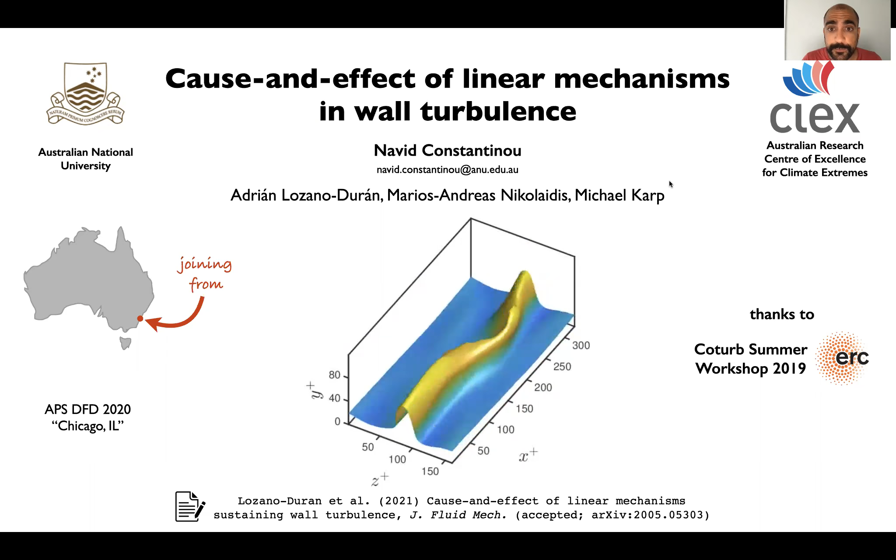The subject is essentially how linear mechanisms contribute to sustaining wall turbulence. We know that in wall-bounded flows, turbulence is sustained via an intimate interaction between coherent structures like the rolls, the streaks, the mean flow shear, and turbulent fluctuations. These interactions come about into what's been called the self-sustaining cycle.

An outstanding question that's been hanging around the past few years is how energy is transported from the time-dependent streak back to the fluctuations to close this cycle. This is something that I'll try to address today.

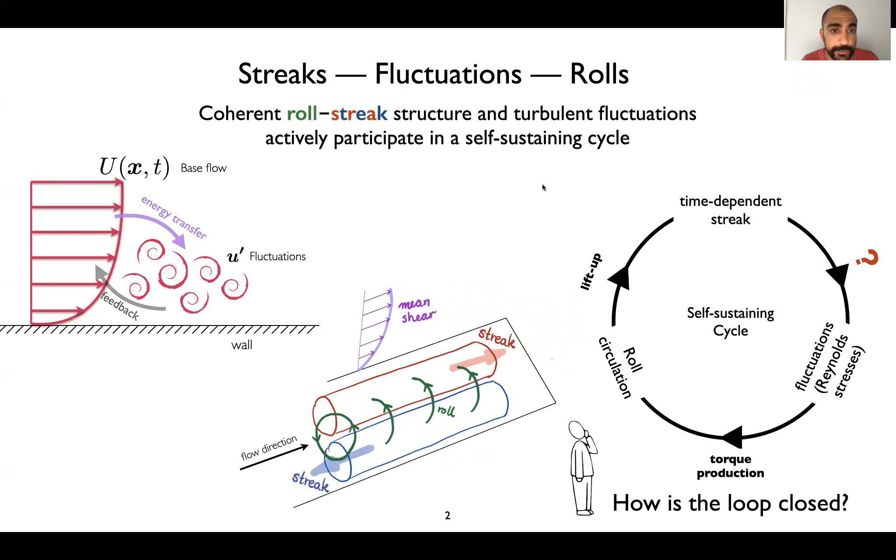Several theories and mechanisms have been proposed for how energy is transferred from the streak back to the turbulent fluctuations. This involves modal instabilities of the streak flow, transient growth due to the non-normality of the linear dynamics, neutral modes and wave-vortex interactions, or parametric instabilities of the time-dependent streak, among others.

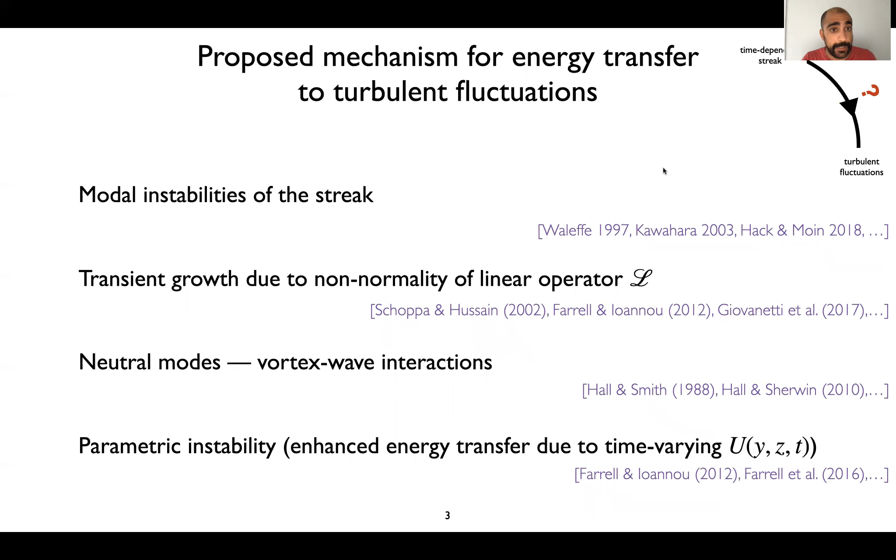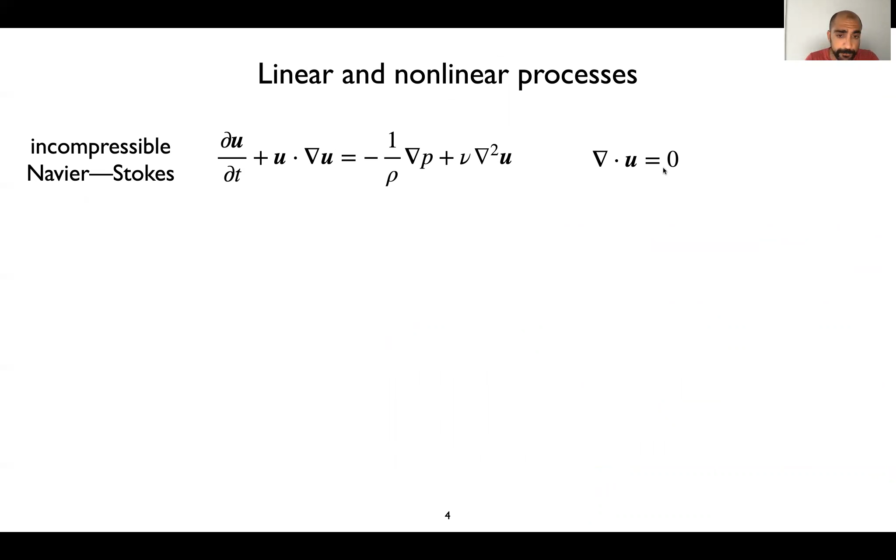So the way we will proceed - let's set the scene. We start with the incompressible Navier-Stokes equations. What we will do is something that may at first seem ad hoc: let's decompose our flow into a base flow that we will call capital U, and fluctuations, anything other than our base flow.

In this particular work, we will take our base flow just to be the streamwise mean of the streamwise component of the velocity. So anything else we call fluctuations. Doing so, we can rewrite our Navier-Stokes equations as two equations: one for the evolution of the base flow and one for the evolution of the fluctuations.

Note that here our base flow varies in the cross-stream, it varies in the spanwise direction, and it also fluctuates in time. So the only thing that we've done is average in the streamwise direction.

Now, the fluctuation equation can be written as shown below, and it involves two parts. It involves a part which has a linear operator that depends only on the base flow itself, and some other part which is quadratic in the fluctuations. This is what we will be calling nonlinear processes.

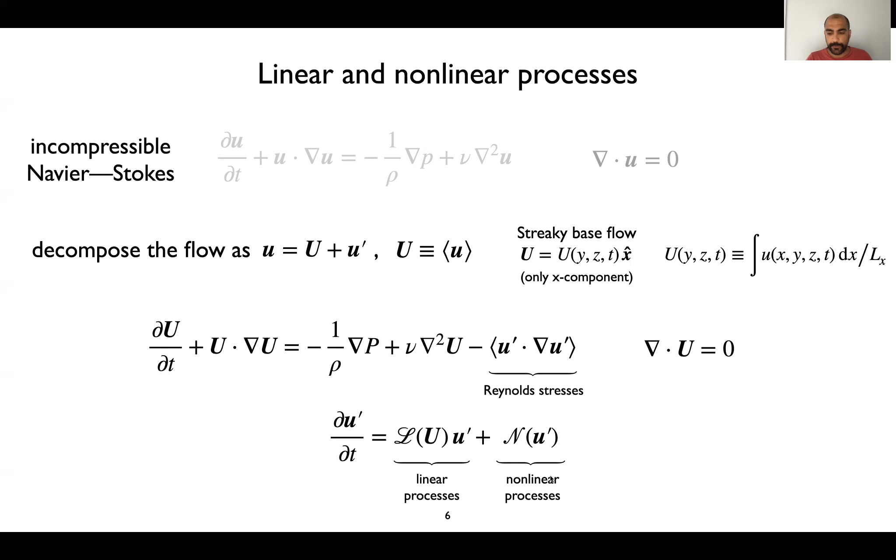So, two remarks. Here, when I decompose my flow, I didn't linearize about any solution of the Navier-Stokes equation. I just ad hoc selected something that I call my base flow, and this base flow has a streak component. It has some spanwise variation, and this will be important.

I decompose my flow and call linear dynamics anything that is included in this process here, which is the linear operator that depends on the base flow and acting on the turbulent fluctuations.

Another thing to note is that if we've chosen our base flow differently, a process that can be included in the linear dynamics here could instead be transferred into the nonlinear part. So what I call linear processes is a function of the choice for what my base flow is.

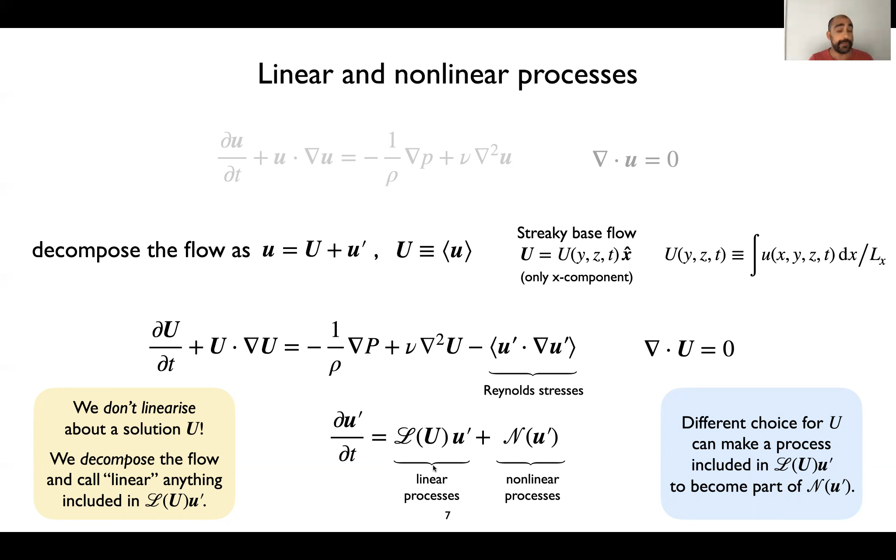So the numerical setup for how we will try to tackle our question of what the main processes are underlying the energy transfer from the streak to the fluctuation is the following. We'll use a minimal flow channel, a constant pressure gradient channel, at Reynolds number tau around 180.

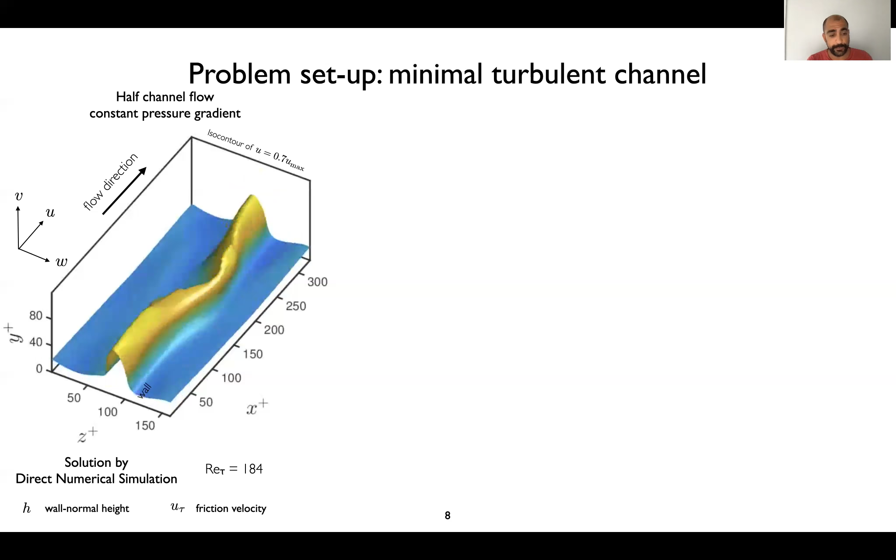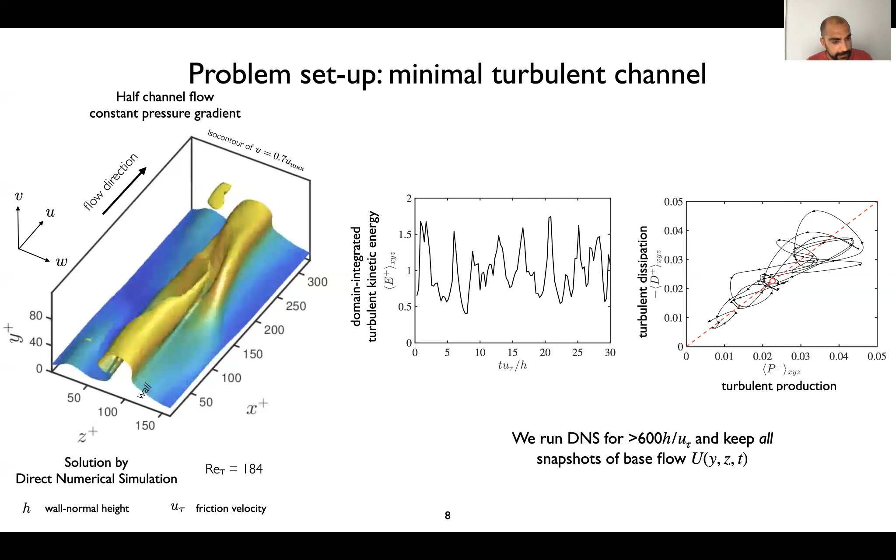What we do is run the simulation for a very long time, and save all snapshots of what we call the base flow, so that we can analyze them later and use them for interrogating our output.

There are two ways to assess the various mechanisms proposed in the literature that come into play. The first method is to interrogate output from the direct numerical simulation. This has the advantage of being a non-intrusive method, but it cannot provide us with causal relationships.

The other method is to go and sensibly modify the equations of motion in the minimal manner possible, so as to preclude some of the mechanisms you're trying to question, and then look at the output of those modified equations.

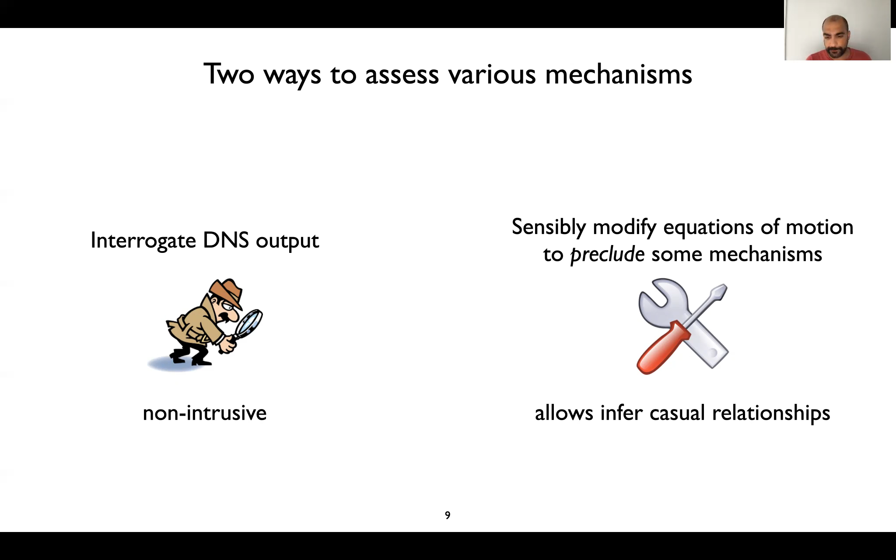This is an intrusive way of attacking the problem, but it allows us to infer causal relationships, which mechanisms are more important than others. So let's start by first asking the question: are modal instabilities of the streaky flow

important for sustaining turbulence? So what do we mean by modal instabilities of the streaky flow? At any point, we have our base flow, we can have a snapshot of our base flow, what we call a base flow, and which involves spanwise variation. So it has a streak component in it.

And we can take our linear operator, the linear operator which was involved in the linear part of the fluctuation dynamics, and decompose it, do an eigen decomposition of that. So here we see the eigenvectors and the inverse of the matrix of the eigenvectors on the right, and we have a diagonal matrix with all the eigenvalues.

So if any of these eigenvalues has a real part which is positive, this means instability of the streaky flow.

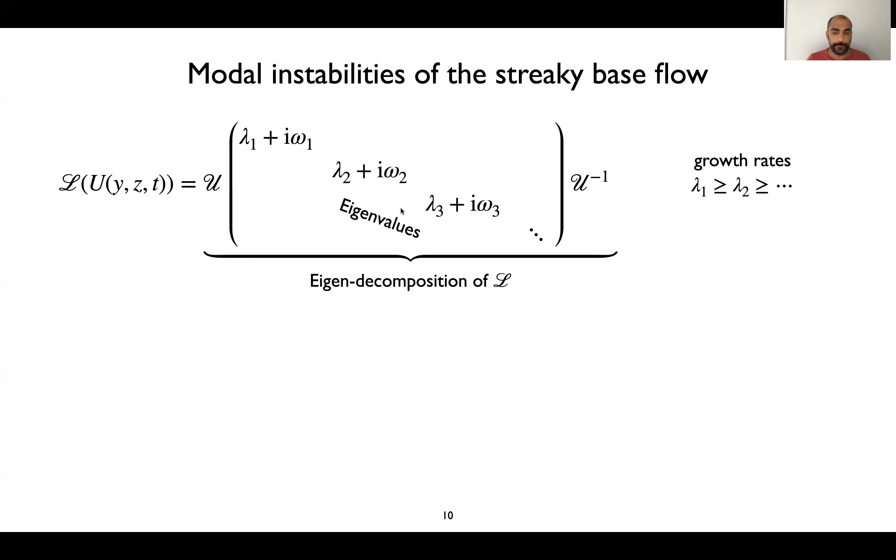And if we do play this game in the direct numerical simulation, we have all the snapshots of the base flow. We've saved all the snapshots at every time step. So we go and we do this eigen analysis at every time step. We see that most of the times, or almost all the times, the flow is unstable. This is the largest growth rate that we find in the flow. And usually there are 2 or 3 unstable eigenmodes at every time instance.

Now, what's also noteworthy is that if you go and compute the autocorrelation of the base flow, we find that the base flow changes at least 3 times slower than the typical e-folding time of these instabilities. So in principle, not only is the flow unstable, but these instabilities have the potential to grow and affect the fluctuations. This is what we get by just interrogating the output.

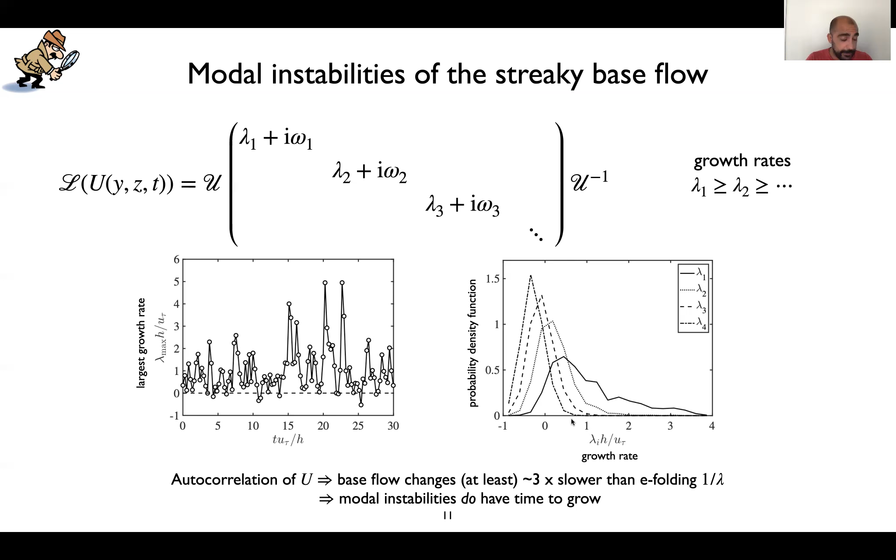Now, if in fact these modal instabilities are crucial for the self-sustaining cycle, it means that if we take them out of the game, then the flow should laminarize.

So what we do is now we go again, and at every time instance, we do an eigen decomposition of the linear operator, and we check whichever modes are unstable, whichever modes have eigenvalues with positive growth rates, we go and make these growth rates negative. So for example, if in this case only mode 1 and mode 2 were unstable, we go and put a minus in front of the growth rates.

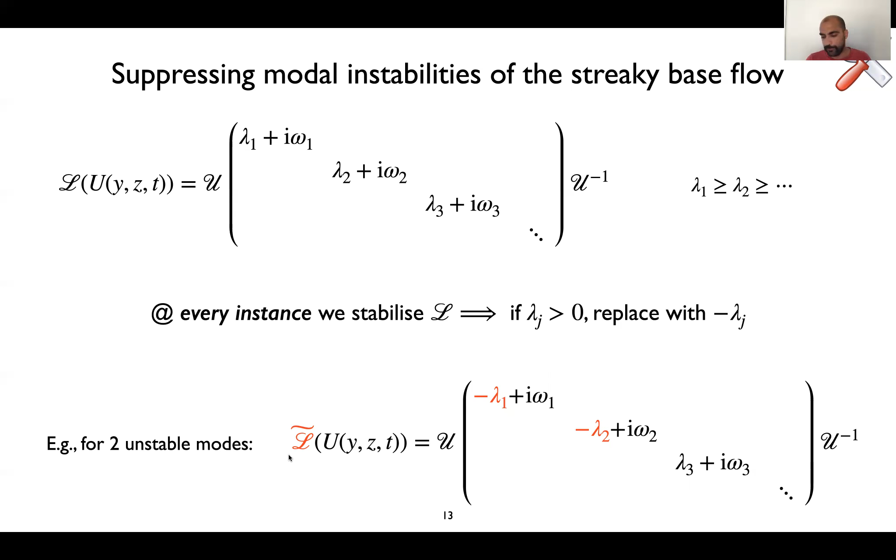We don't change anything else, the structure of the eigenmodes, nothing else is changed. We compose back the linear operator, and we denote it with a tilde on top, just to remind ourselves that this is a stabilized version of the linear operator.

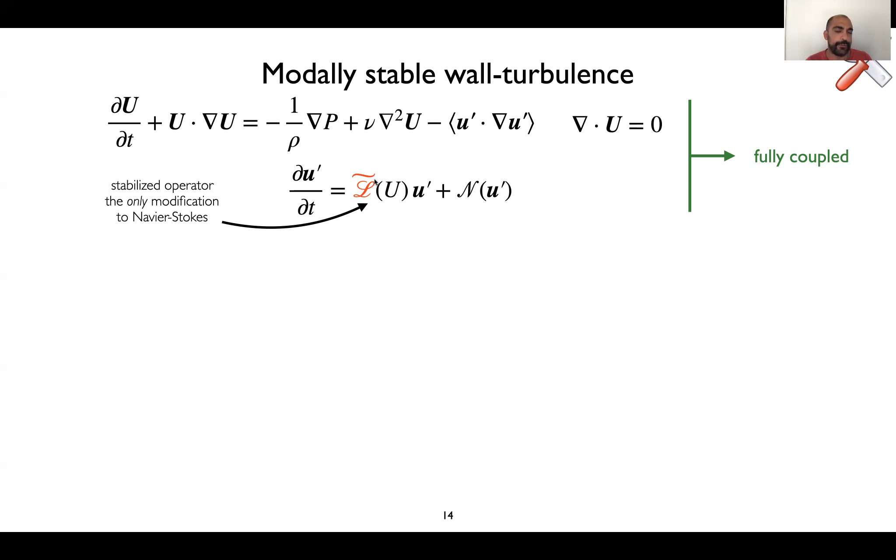And now we can run Navier-Stokes again with only this slight modification, that at every time instance, if our base flow corresponded to a linear operator which had 2 or 3 unstable eigenmodes, these unstable eigenmodes were rendered stable by changing the sign of the growth rate of the eigenvalue, nothing else.

So we do that, and we see that, of course, in this case there are no instabilities by construction, but the flow is still turbulent. So if we see the time series, a slice of the time series of the turbulent kinetic energy, there's still turbulence in the flow. And we see the turbulence production dissipation diagram. It looks more or less like before.

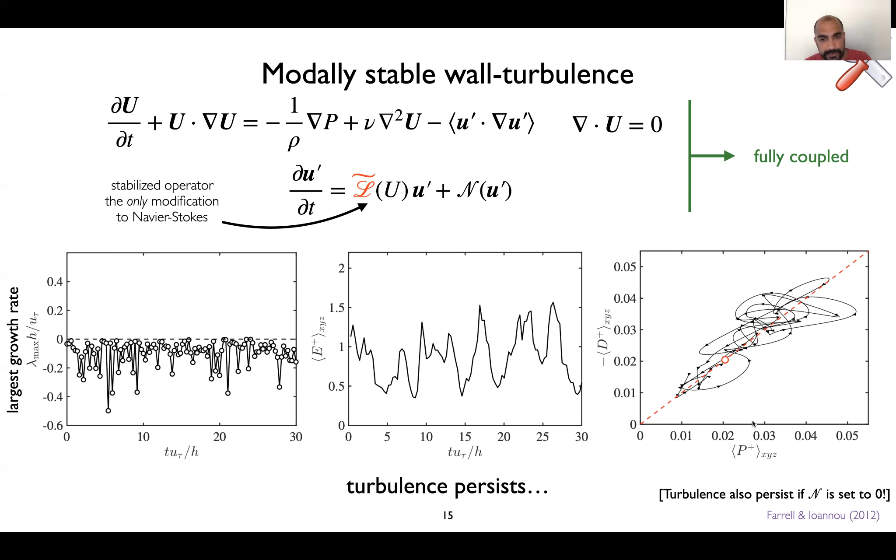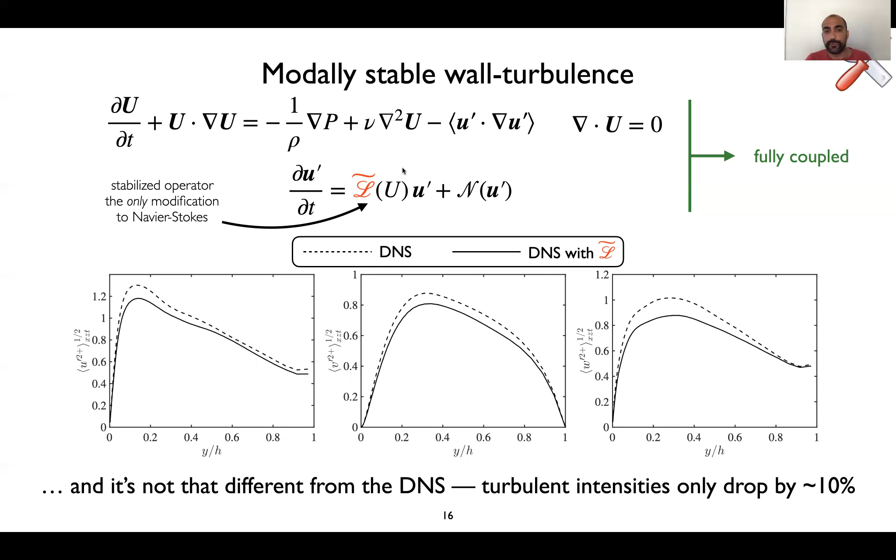Not only is the flow turbulent, but with more or less the same statistics. Here we see with dashed lines the turbulence statistics from the direct numerical simulations without any modification, and with solid lines the same statistics from our stabilized direct numerical simulations. So the only difference, removing the modal instabilities, is that we see the turbulence intensity dropped by around 10%. But other than that, the flow remained turbulent and looked as turbulent as before.

So with that, we conclude that modal instabilities are not crucial for the self-sustaining cycle.

What's important to note here is that interrogating the output did not provide us with these conclusions. Just from interrogating the output, we saw that modal instabilities were there and had the potential to be important, but it was only when we causally, sensibly modified the equations of motion and saw what the output is, that we were able to make this causal relationship about modal instabilities not being important.

So next, we want to understand if non-modal transient growth is important for closing the loop in the self-sustaining cycle. Non-modal transient growth refers to energy amplification or perturbation amplification.

If you have a linear system at any finite time horizon, it can be quantified by the maximum energy gain you can get over a time interval capital T. It's just the maximum over all initial conditions of the energy of the fluctuations at time after capital T, after the initial time.

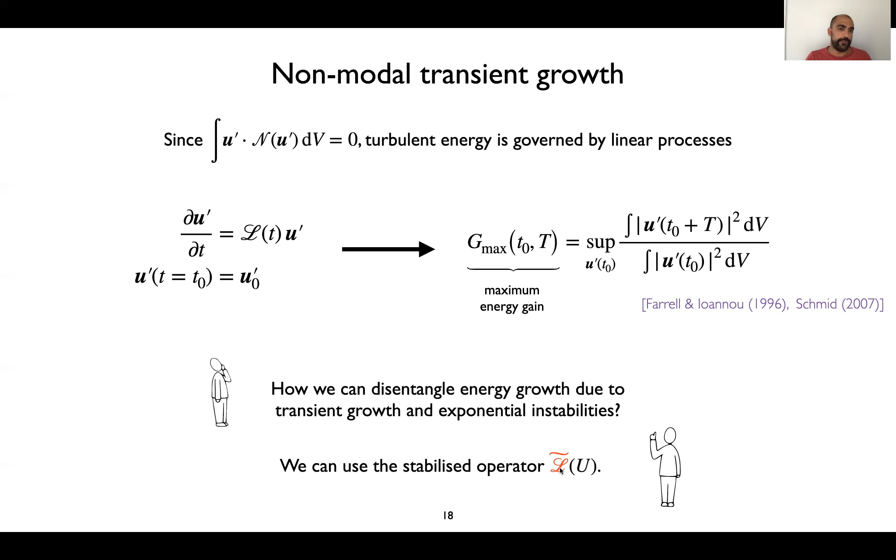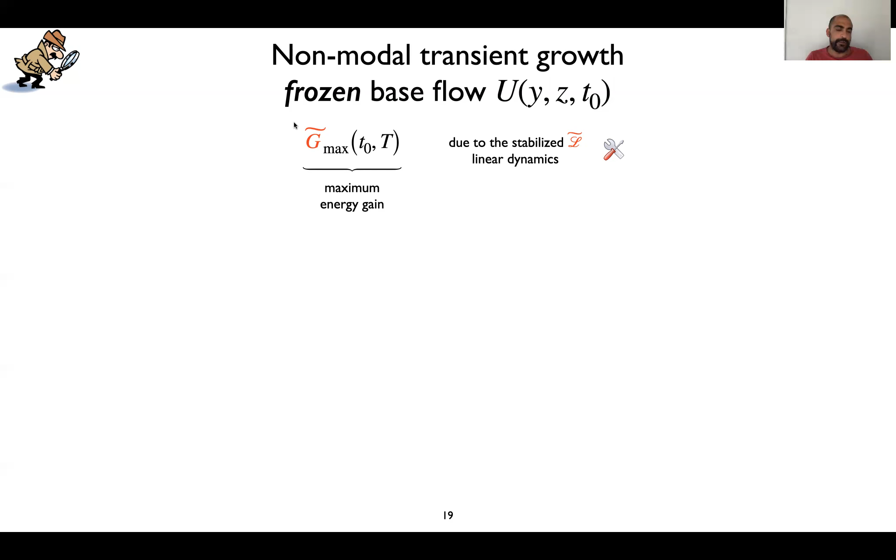So we compute now this maximum energy growth, with a tilde to remind us it's from the stabilized linear operator, for various base flows that we've saved. Remember, we've saved the base flow for every time step of our simulation, so we can take all of them and compute their energy gain as a function of this time horizon, capital T.

And for that to come about, it's important to compare with the same energy amplifications that come about when we use as a base flow the time mean and span-wise mean and stream-wise mean—just the mean flow shear, which varies only in the cross-stream direction. In that case, we get energy gains of order 10.

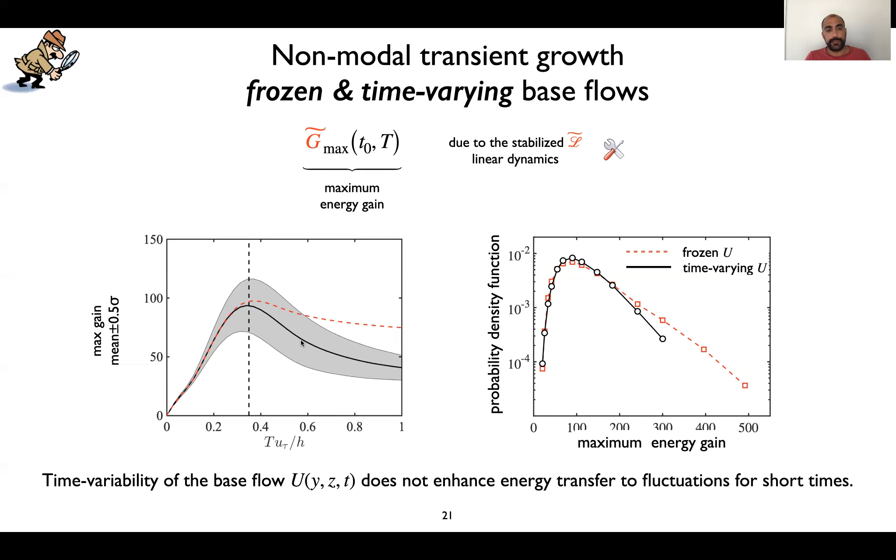We put the whole time series and do the same calculation, and here's what we find. In red is what we had before with the frozen snapshots, and in black is what we find for the energy amplifications when we use the full time-varying base flow. We see that for short times, more or less, there's no change.

So the time-varying base flow gives us the same energy amplification as the ensemble mean of all the various frozen snapshots we had before.

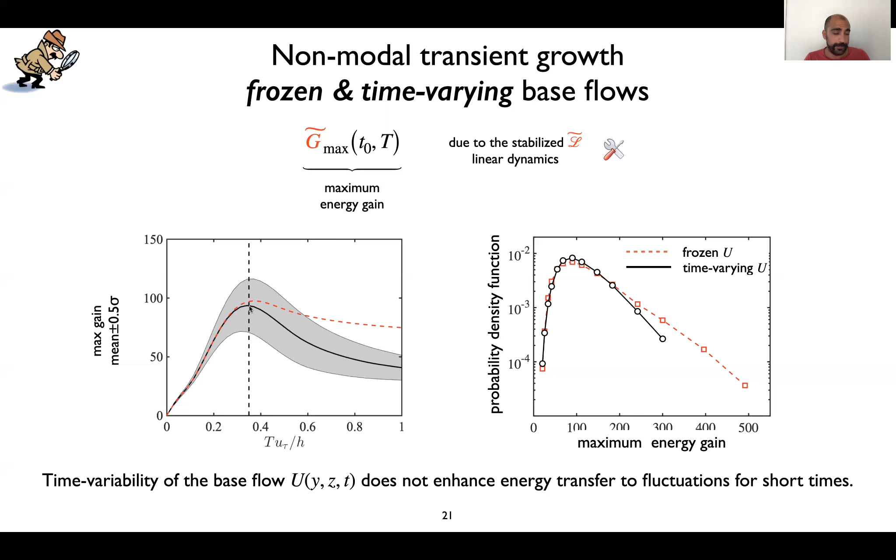This is just from interrogating the output of the DNS, or modifying it slightly, just to make sure we are not confusing energy growth due to non-normality and energy growth due to linear instabilities. But the real question is: is this non-normal energy gain enough to sustain turbulence?

So what we do here is go back to our fluctuation dynamics, and we run again these simulations, just the fluctuation dynamics, using the stabilized linear operator and only a frozen snapshot of our base flow. Remember, we have a lot of base flows saved, so we put a series of them, and each time we run the simulation and ask: does it sustain, does it remain turbulent, or does it laminarize?

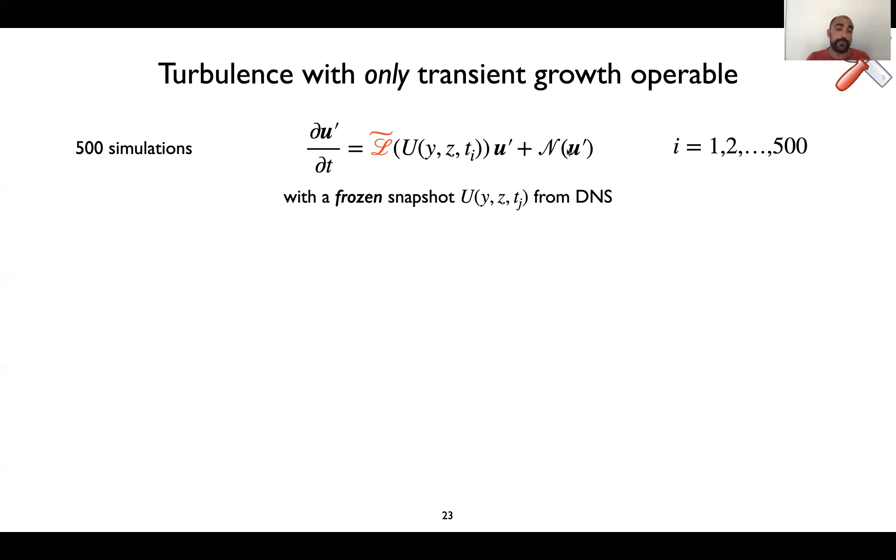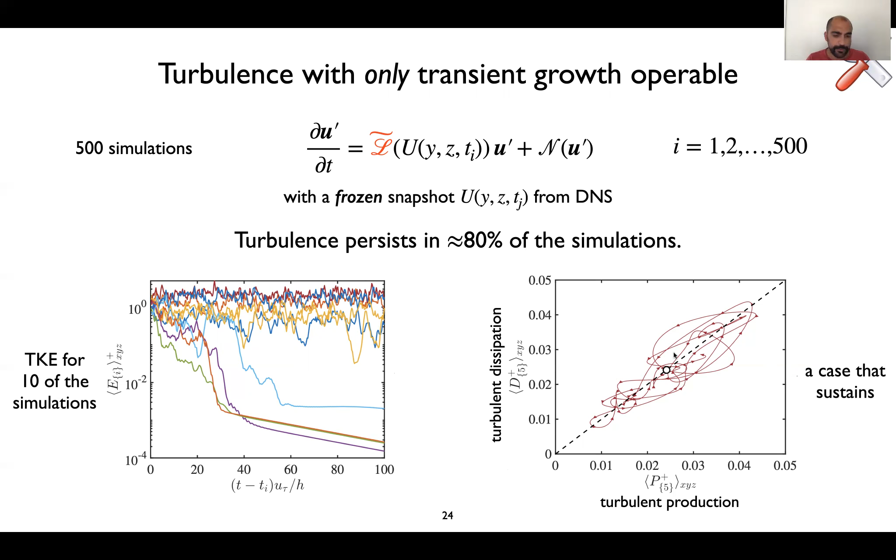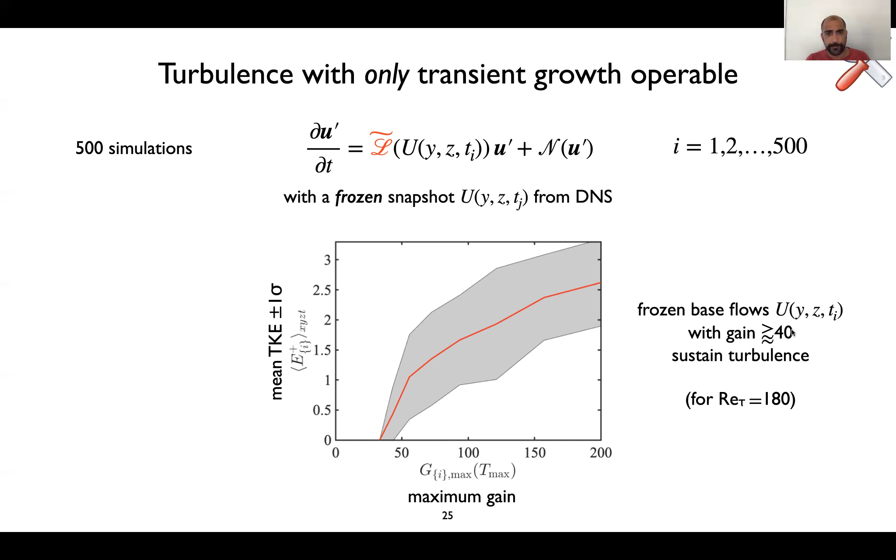Now the question that arises is: what was different between the base flows that were able to sustain turbulence just through non-normality, just through non-modal amplification, and the base flows that were not able to, in which case the turbulence laminarized?

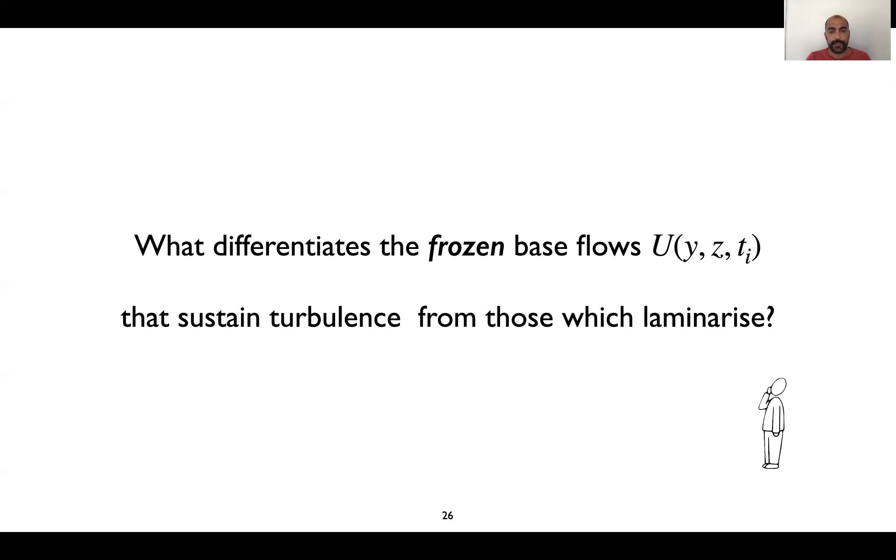And here I'm just presenting you this optical evidence, but if you go and read our paper, we've made a lot of detailed experiments to quantify how the spanwise shear is crucial for producing non-normal energy gain and sustaining the turbulent flow.

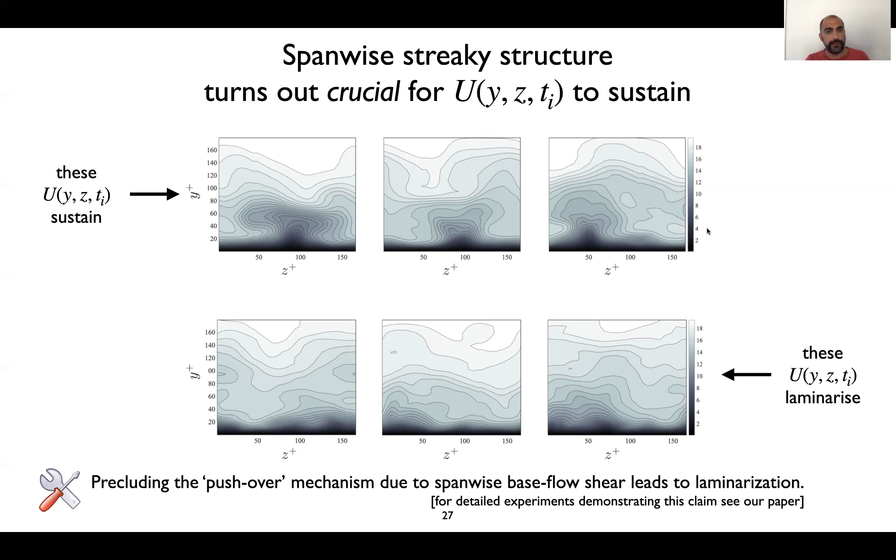So in summary, we've seen that modal instabilities of the streak are not crucial for the self-sustaining cycle. They do matter — removing them resulted in a 10% reduction in turbulence intensities, but it did not change the qualitative picture of the flow. So if one asks, how does energy go from the mean flow back to the perturbations, back to the fluctuations?

One simple answer is via transient growth. This is what our experiments seem to suggest. And what produces this transient growth? Mostly the spanwise shear of the base flow. So the streaky component of the base flow is what is crucial for producing transient growth and energy amplification through non-normality.

For a thorough discussion on this, I'd urge you to have a look at the paper. And what else we found, and I haven't discussed this much, is that the time variability of the streak doesn't seem to enhance the energy transfer to the fluctuation, but it does allow the flow to sample all these independent transient growth events, resulting in the actual observed statistics.

Remember, when we asked about the energy gain from a time-varying flow, we found it was exactly the same gain as the sample average from all the different frozen snapshots of our base flow. More of this in the paper.